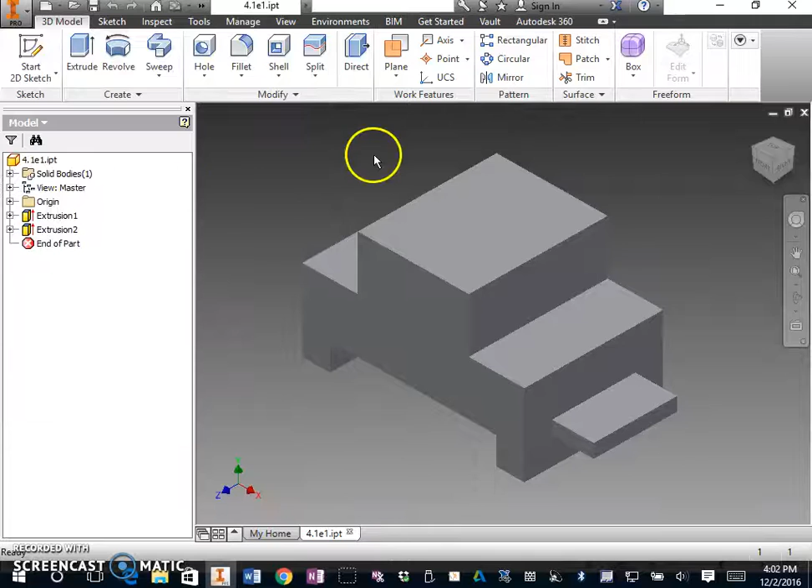Okay, so now we're going to start to model this guy. So in order to do that, I'm going to go back to Inventor. By the way, if you haven't done so already, I would also like you to iPro Save As, and save this dude just to your default documents or whatever. And then that way you can go into OneNote and insert File Attachment, find wherever you saved that dude, and add him there so that I have your part file as well on top of the screenshot.

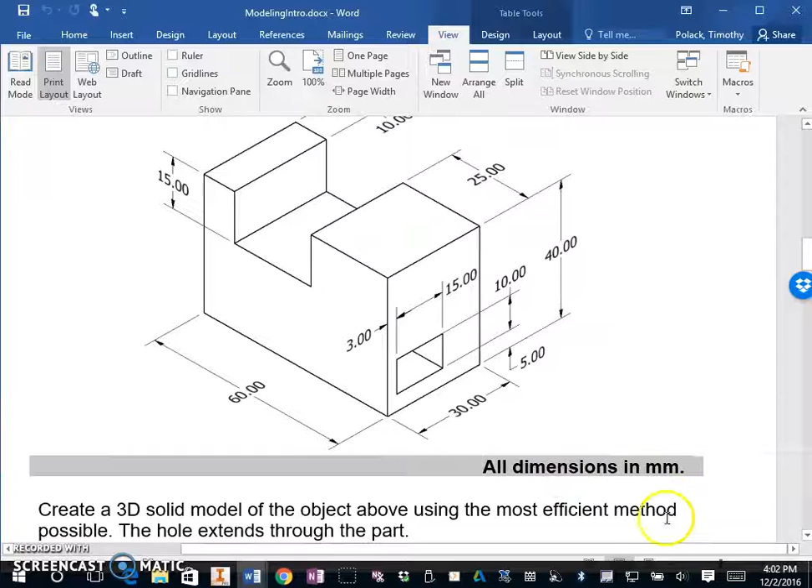Okay, so in any case, we're going to model this guy. Now notice, all dimensions in millimeters. The default for Inventor is inches, so if I want millimeters, here's how I'm going to have to do that. We're going to go to New, and I'm not just going to click Part, I'm just going to click New.

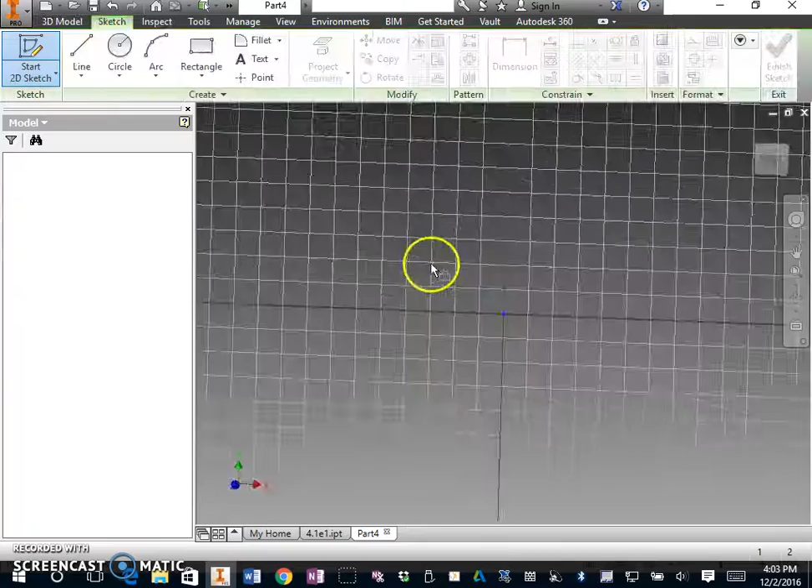Alright, so that brings this guy up. Probably your default is on English. Normally you choose a standard inches.ipt, but if you change the folder to metric, over here, here's your standard millimeters.ipt. That's what we want, so double click that. Alright. Start a sketch, XY plane. And let's start clicking through here.

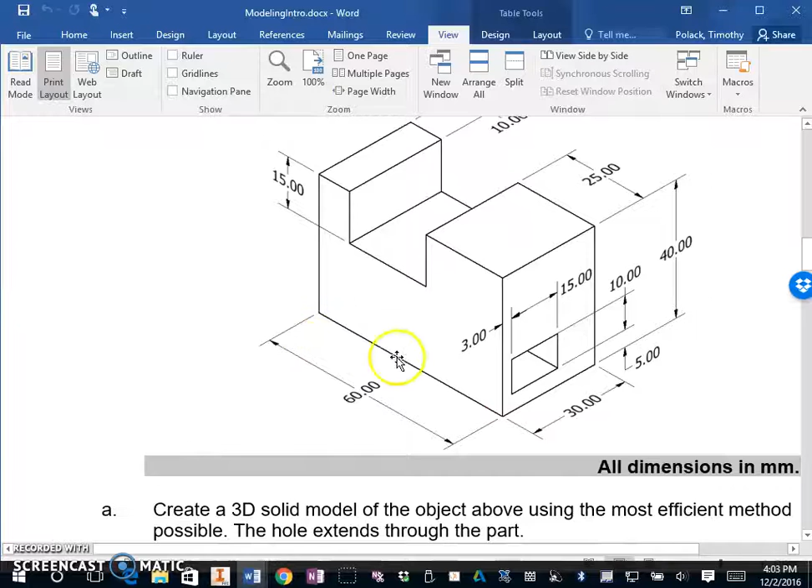So generally my approach for this is I am going to draw this general outline of what you would see in the front orthographic projection. I'm going to extrude that back, and that takes care of this cut right here. And then all I'm going to have to do is add a rectangle on the side and extrude cut that through the whole thing. So let's do it.

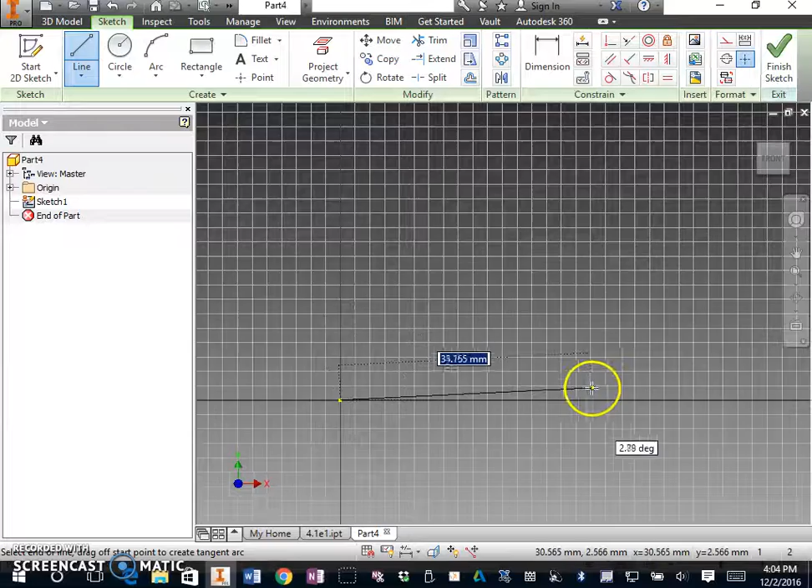Grab my line tool and let's just start going. I'm going to start in the origin, and this time I'm just going to start moving right. So this, I'm going to zoom out a little bit. This is supposed to go 60, so I'll type in 60. Then we're going to move up. We come up 40. Then we're going to move over 25. Down 15.

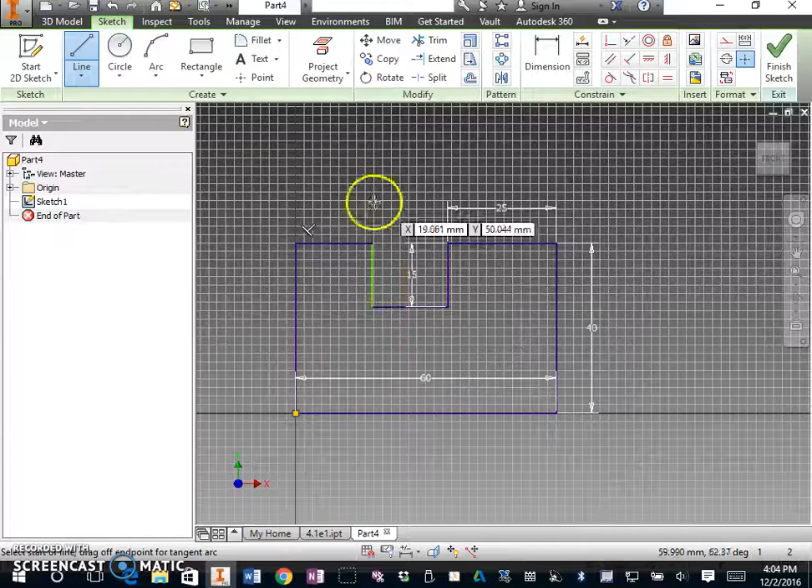Back over again, and it doesn't give me a dimension for that, I don't think, but the whole thing is 60. Yeah, whatever, we'll figure it out. I'll just add this guy right here, so that's supposed to be 10, which I'll go back and add later. Alright, cool. So I'm done with my lines. I'll grab my dimension, make sure that dude says 10. There we go, now I didn't have to do any math. If you didn't do it my way, that should have ended up being 25.

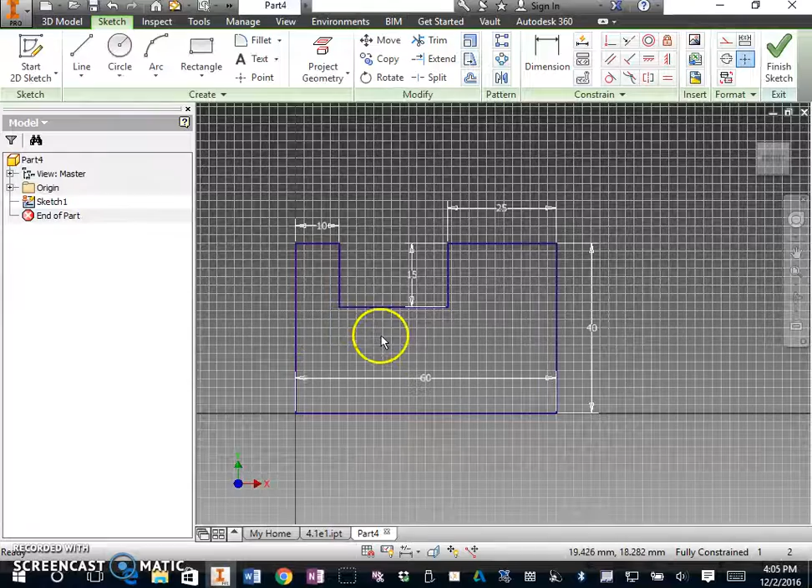So, I've got my general front shape. Finish sketch. We're going to extrude him to a depth of 30. Okay? Cool. I'll also go ahead and change my visual style here. Shaded with edges the same way we did last time. Okay, so now I've got to add this cut dude down here. I've got to draw a rectangle and cut it all the way back.

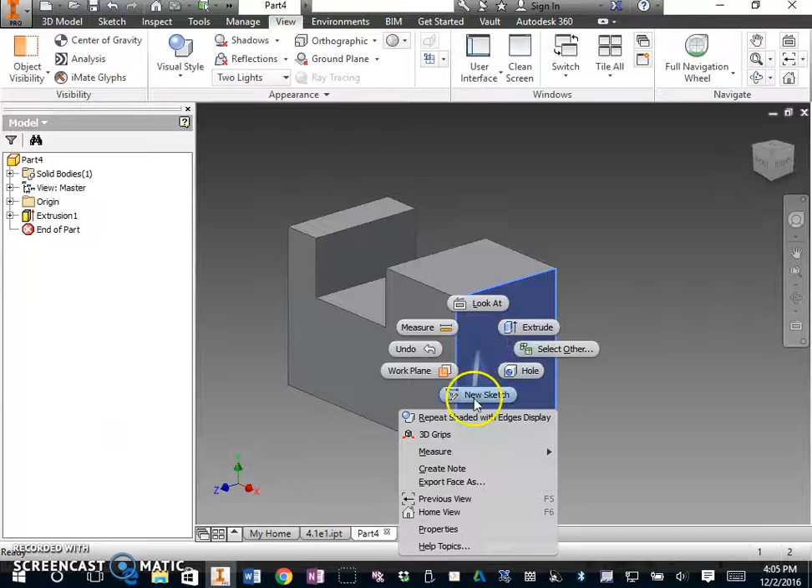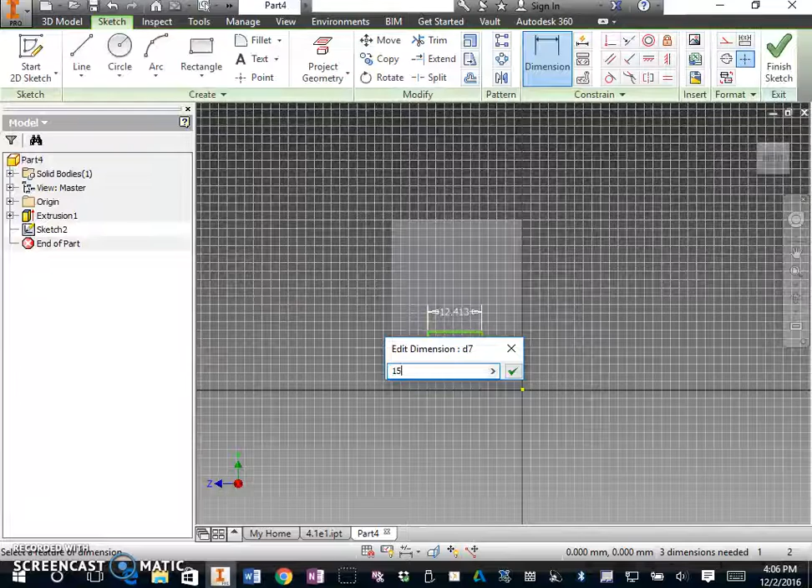So I want to start a new sketch there. I can right click him and go to new sketch, or I can under my 3D tab click start 2D sketch and then click on that surface. Grab a rectangle, draw a rectangle, it doesn't really matter right now. And now, yeah, okay. Save often. Grab my dimension tool, and this dude is supposed to be 15. The other dimension that I'm given for the rectangle is that's supposed to be 10.

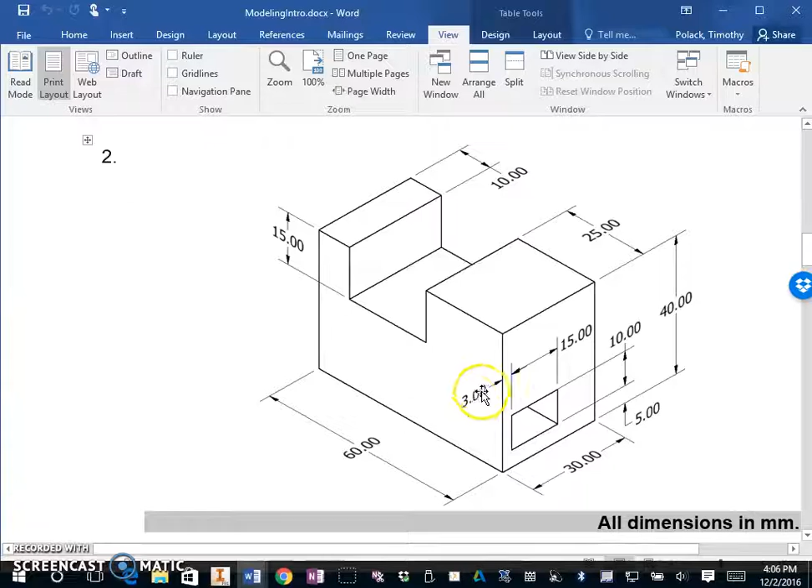And now if you look at your paper, we have an arrow pointing in there and an arrow pointing over here, so this distance is supposed to be 3. So I can grab my dimension tool and click this line, this reference edge, over, click this line, and that's supposed to be 3 on the dot right there.

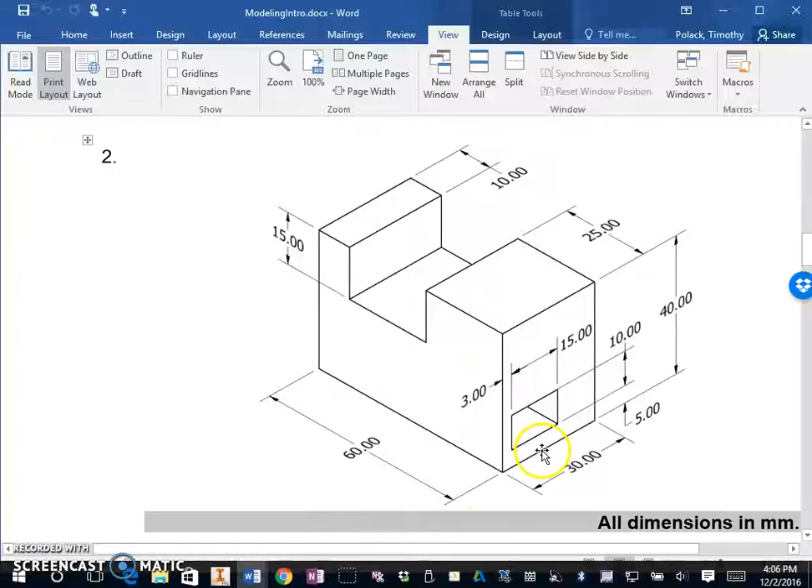And then I've got another reference dimension. The vertical reference dimension is this 5 right over here. It's pointing at the distance between these two extension lines, so that's supposed to be 5 millimeters right over there. So dimension from there to there. Why isn't it letting me? There we go. Dimension from there to there, 5.

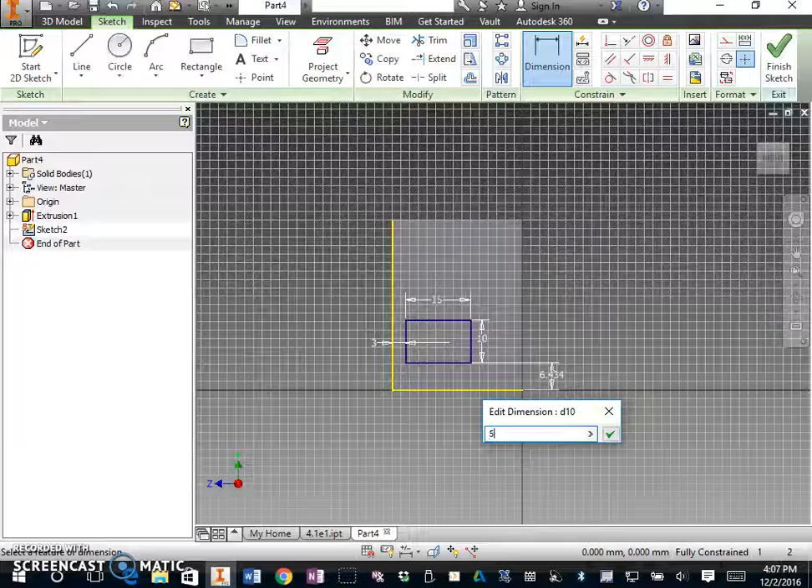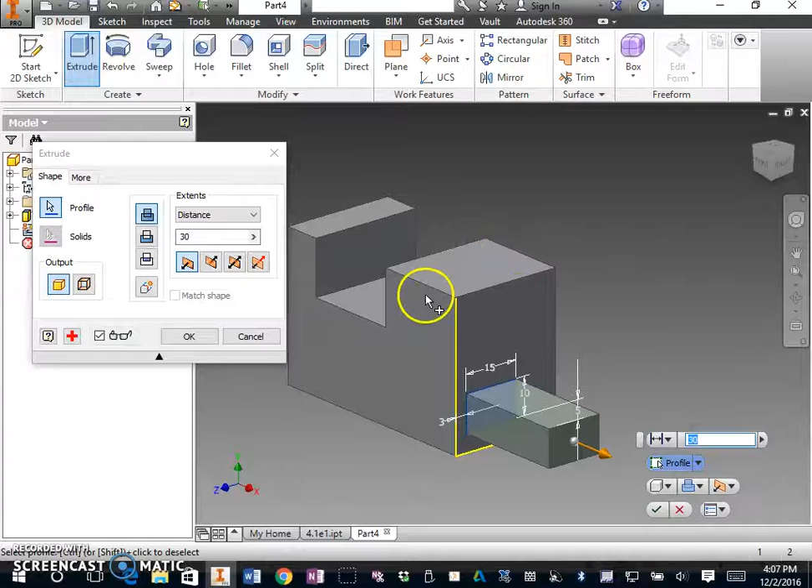Okay, so once he's lined up, click Finish Sketch, and we're going to extrude cut. So either click Extrude up here or go to your quick wheel, Extrude. What do you want to extrude? I want to extrude that. Default is adding, but I want to subtract. So there's a couple different ways that you can do that. You could either go to this second tab, which will be a default cut, or if I stayed with the join, I could say go in the opposite direction, in which case it will start to cut. I think probably I'm going to change this to cut in that direction.

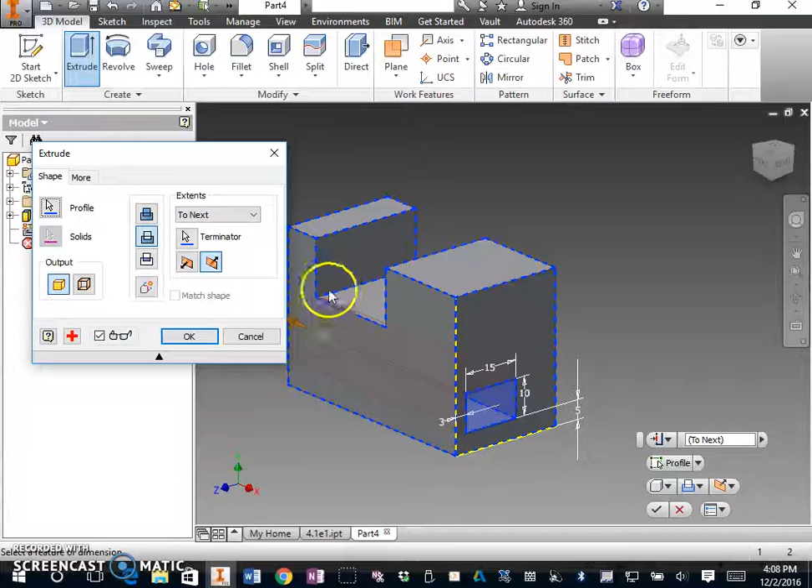And instead of distance, so you could type distance and then type how long this is, so 60 is how long it is, and that cuts through the whole thing. But rather than doing that, I'm just going to change distance to next, and that way it will simply slice through everything until it gets to the next surface, which is on the other side. Okay, so if I spin this around, you can see I've actually cut through the whole thing.

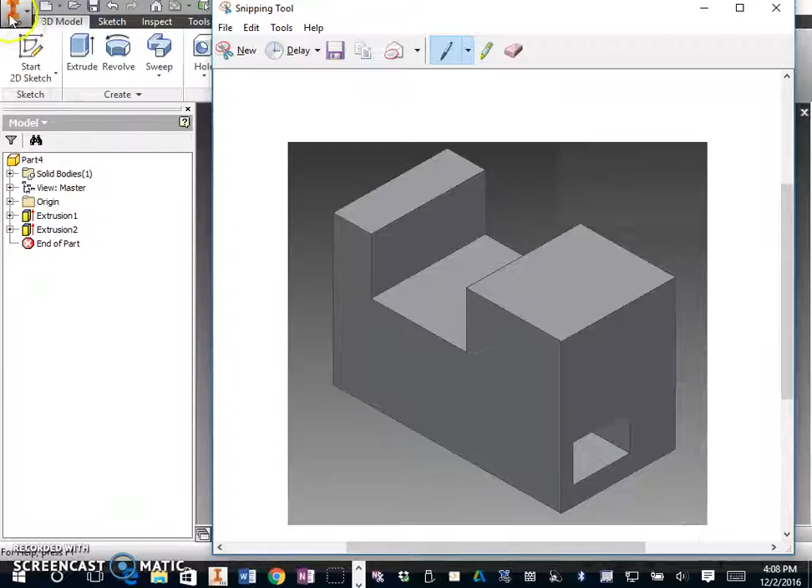And we're done. So, snipping tool, paste that into OneNote. Also, iPro save it as a part file somewhere that you can access, and then insert that part file into OneNote and move on to the next part.